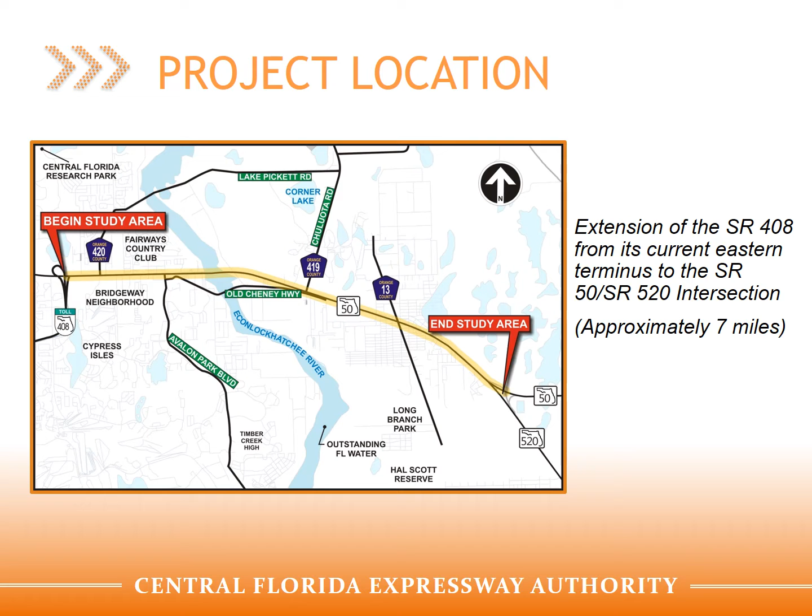CFX is evaluating the potential to provide an extension of State Road 408 from its current eastern terminus along State Road 50 eastward to State Road 520. This new 7-mile extension of State Road 408 would be the first component towards providing a west-east high-speed corridor with eventual connectivity to I-95, enhancing mobility for the region and CFX's customers.

This study is currently in the second phase of the project development process, known as the Project Development and Environment, or PD&E, phase. The PD&E phase generally involves three components: developing and evaluating engineering alternatives, determining the impacts those alternatives will have on the social, natural, physical, and cultural environments, and obtaining public input and consensus.

The PD&E study entails the preparation of all preliminary engineering and environmental documentation, including a State Environmental Impact Report, SEIR, and all additional environmental documents.

There are four principal needs that serve as the main project justification: provide additional regional mobility in the west-east direction in northeastern Orange County, provide additional emergency evacuation service to supplement the limited capacity of the existing evacuation routes, provide improved transportation connectivity and linkage induced by continued population growth in the area, and provide transit support.

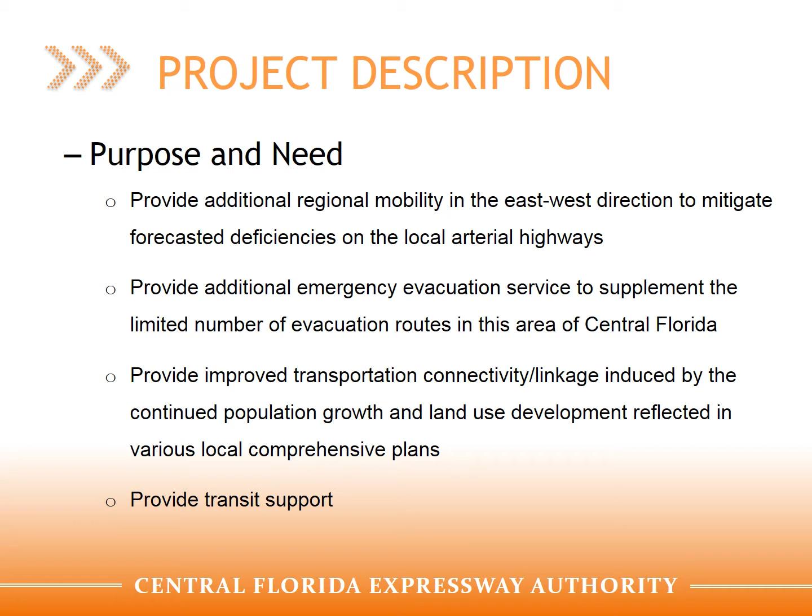As part of this PD&E study, we have already validated the results from the previous feasibility study, determined the future traffic demand in the year 2045, and developed feasible alternatives for a tolled limited access facility along the State Road 50 corridor. The purpose of this meeting is to obtain public input and comments on the alternatives that have been developed. These alternatives are on display here tonight.

The study team will take all comments into consideration, determine the environmental and community impacts associated with each alternative, and document the findings. The main goal of the study is to reach consensus on the location and design of the potential State Road 408 Eastern Extension.

The results of the Concept Development and Evaluation Study Report prepared in 2008 indicated that Corridor 3B along State Road 50 is the most feasible location for the future eastern extension of State Road 408.

Governor Rick Scott signed Executive Order 13319 on November 1, 2013, creating the East Central Florida Corridor Task Force with the purpose to evaluate and develop consensus recommendations on future transportation corridors serving established and emerging economic activity centers in portions of Brevard, Orange, and Osceola counties.

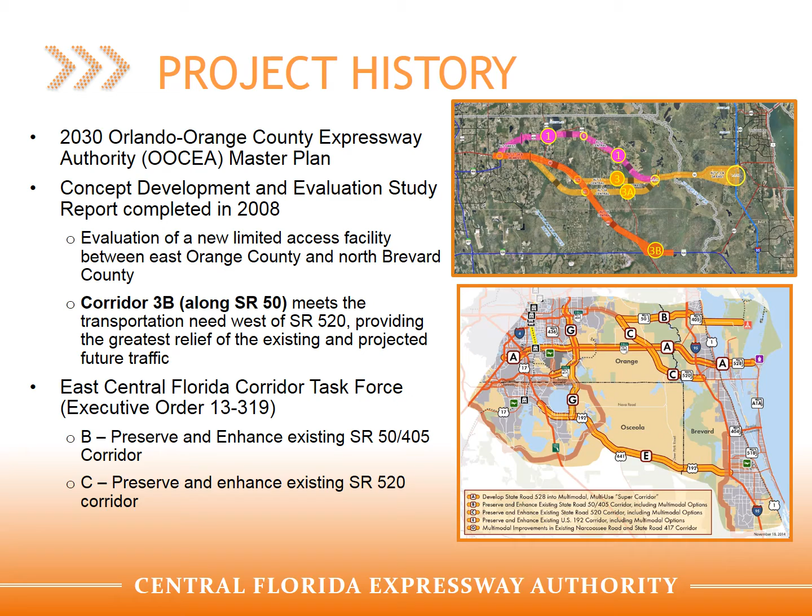As part of this study, CFX has finalized an update to the Concept Development and Evaluation Study Report prepared in 2008. The results of the study confirmed that the most feasible location for the future eastern extension of State Road 408 is along the existing State Road 50 corridor.

The use of a majority of the existing State Road 50 facility's right-of-way makes the proposed improvements along the existing State Road 50 corridor, Corridor 3B, the most reasonable choice.

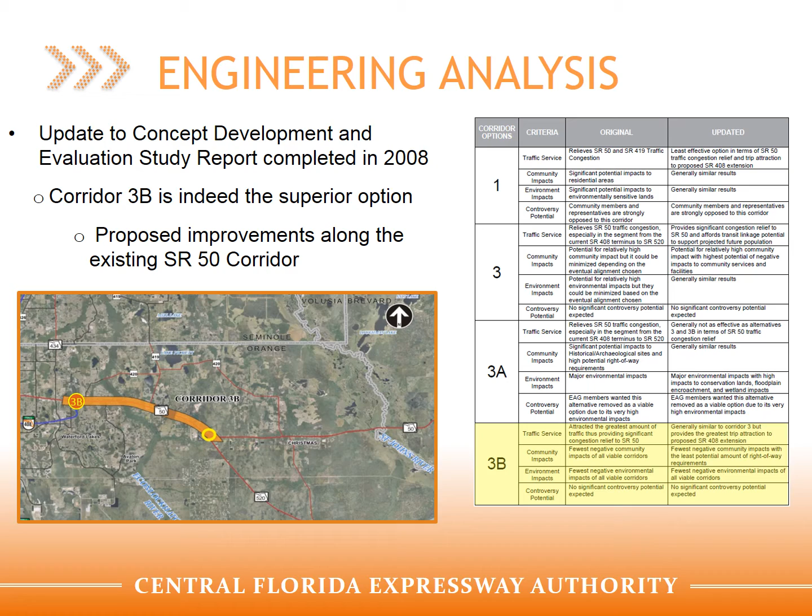Prior to the generation of alternatives, the project was broken down into distinct segments having similar characteristics. This approach ensures that each alternative is more responsive to the needs of each segment rather than generalized project needs.

Segment 1 is from the existing State Road 408 / State Road 50 interchange to Avalon Park Boulevard. In general terms, Segment 1 is more urban in nature and exhibits a higher traffic demand than the rest of the corridor.

Segment 2 is from Avalon Park Boulevard to Chuluota Road. In general terms, Segment 2 serves a lower density area than Segment 1 and features sensitive wetlands and habitat, a curved alignment, and a crossing of the Econlockhatchee River.

Segment 3 is from Chuluota Road to State Road 520. In general terms, Segment 3 is more rural in nature with a lower traffic demand.

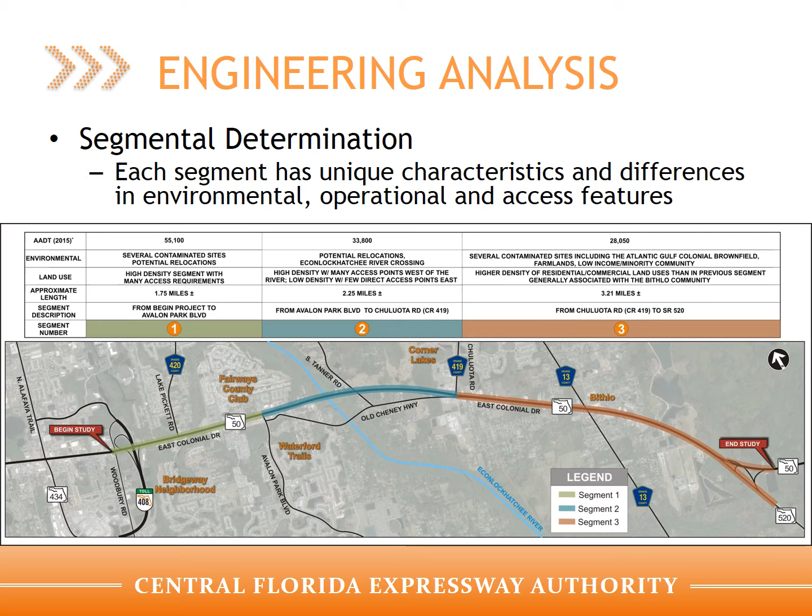14 different typical section alternatives were generated, which included both at-grade and elevated options located just to the north, just to the south, and in the center of State Road 50.

Several interchange configurations were developed at the State Road 50 and State Road 408 interchange, as well as at the Avalon Park Boulevard, Chuluota Road, and State Road 520 intersections to provide access between State Road 50 and the State Road 408 extension.

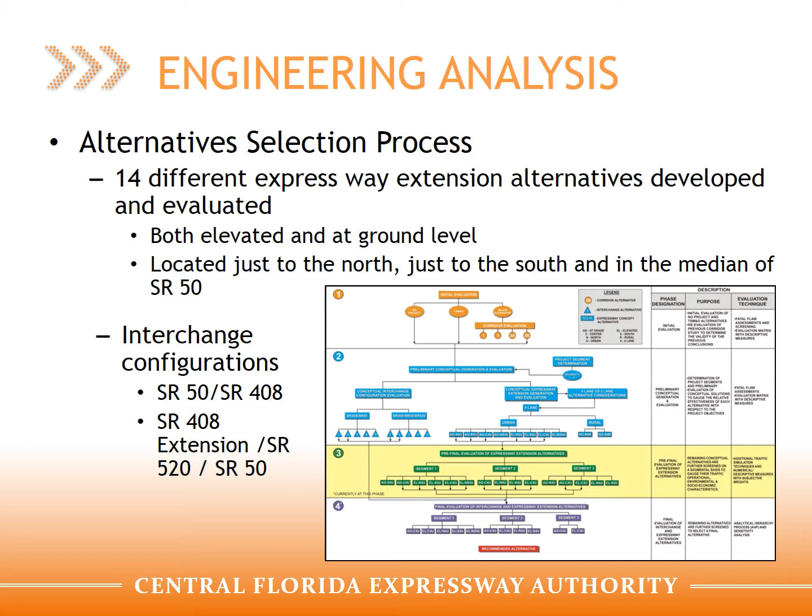Detailed comparative evaluation matrices were utilized for each of the three segments, taking into account different evaluation parameters, including engineering, socioeconomic, environmental, and cost factors.

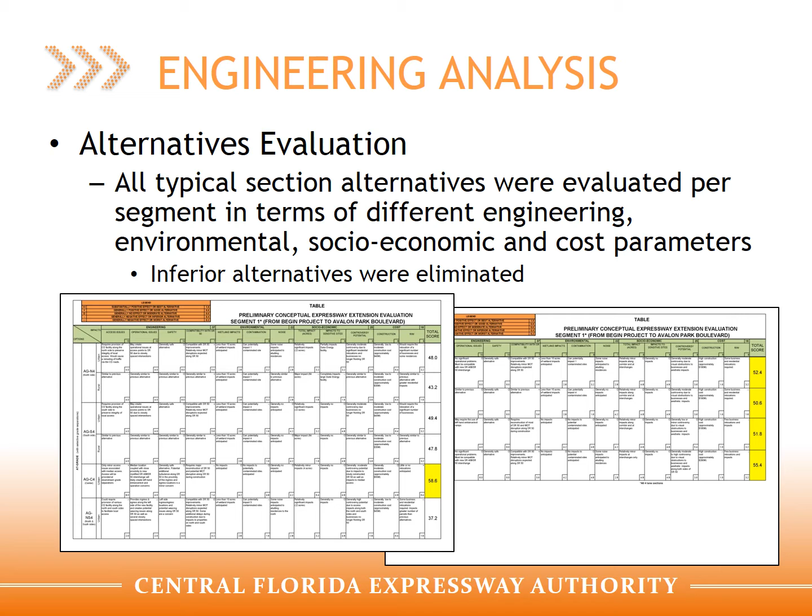Within Segment 1, the preliminary alternative evaluation determined that 5 typical section options are the most feasible and will be evaluated further, including at grade in the center of State Road 50, elevated in the center of State Road 50, elevated just to the north of State Road 50, elevated just to the south of State Road 50, and elevated with the eastbound direction just to the south of State Road 50 and the westbound direction just to the north of State Road 50. All of these alternatives have been conceptually developed and are on display here tonight for your comment.

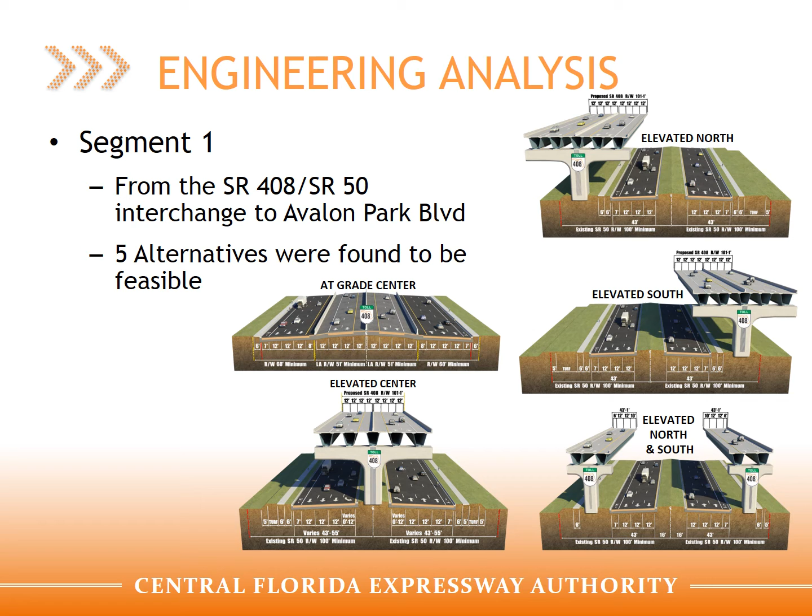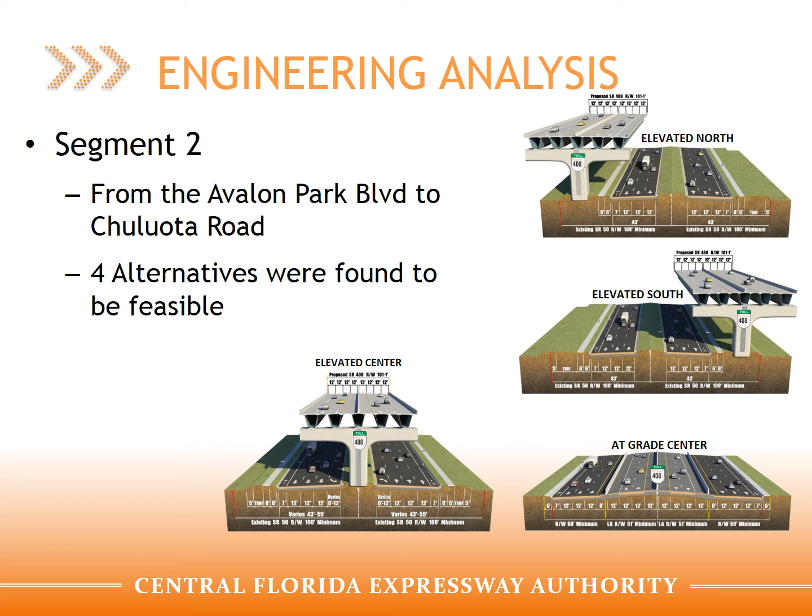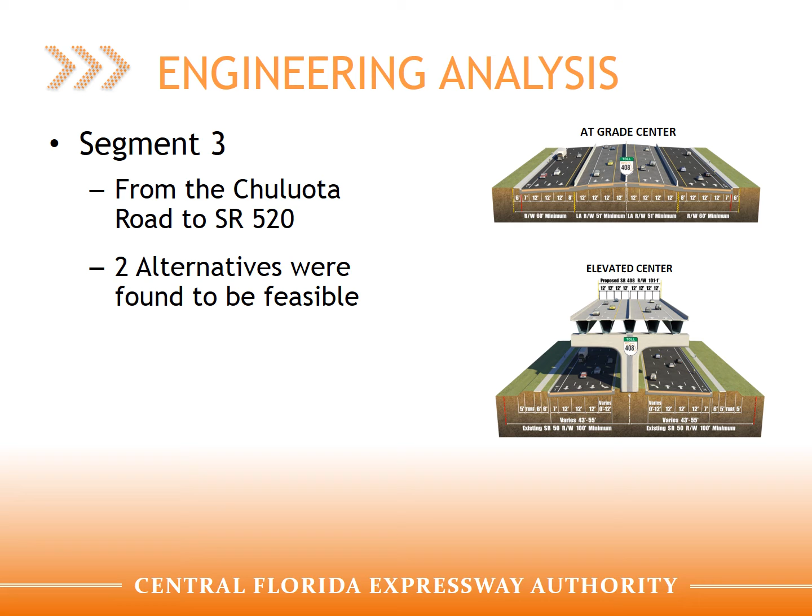All of the alternatives determined to be most feasible will be evaluated in terms of their impacts to the social, natural, physical, and cultural environments. The findings of these studies will be documented in the State Environmental Impact Report and all additional environmental documents.

In 1989, the Florida Department of Transportation completed a PD&E study for the widening of State Road 50 and is currently in the process of implementing a series of construction projects to expand the State Road 50 corridor from 4 to 6 lanes from State Road 436 to State Road 520, utilizing an urban typical section with curb and gutter sections and a raised 32-foot median within the existing 200-foot right-of-way.

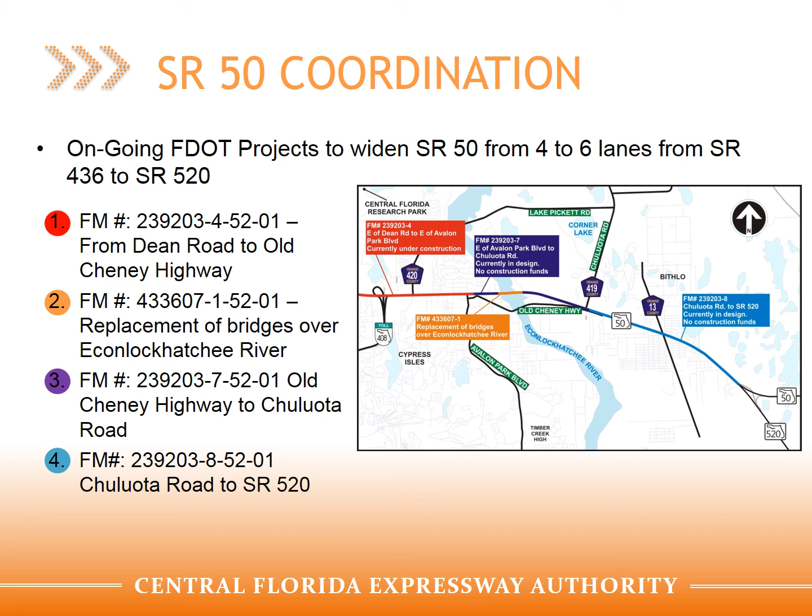CFX has been and will continue to coordinate with FDOT to minimize duplication of efforts and maximize efficiencies between all future planned projects.

The next steps involve obtaining community feedback on all preliminary alternatives and the selection of the preferred alternative. The next Project Advisory Group and Environmental Advisory Group meetings are scheduled for July of 2016. Once all draft documents have been completed, they will be placed on public display, and the final study public hearing is currently scheduled for August 2016.